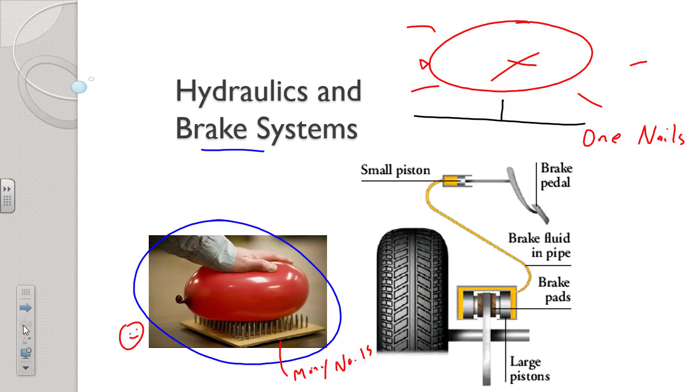What I want you to be able to distinguish in this unit is the difference between a force and a pressure. When this person puts their hand down on the balloon, they're applying a force. But that would be true up here too. If somebody puts a force down on the top of this balloon, the force could be the same. The force isn't what breaks the balloon.

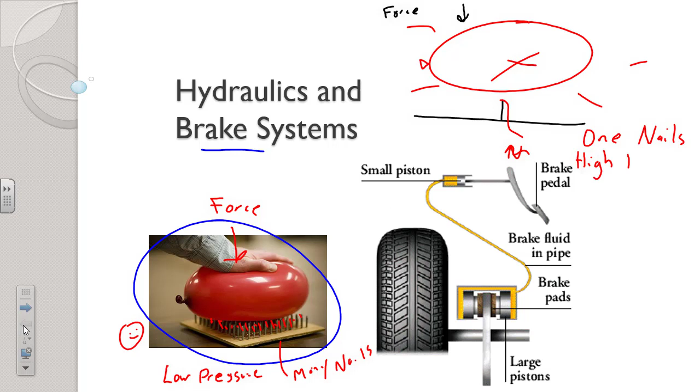As you're probably thinking, that force on the balloon gets spread out when there's a lot of nails. So all those nails are pushing simultaneously on the balloon, and that decreases the pressure. Even though it looks really dramatic, because there's so many nails, there's not that much pressure on the balloon. Whereas here, where there's only one nail, that would create a spot where there's a real high pressure, and that's going to break through the balloon. So let's explore that a little bit more.

Okay, fundamentally, this is the relationship that we're going to build on today. The amount of force that we have applied to an object, and force always gets measured in pounds. Now, in the metric system, we could measure that force in newtons, but we're only going to work in the imperial system. And so LBS, the abbreviation for pounds, will always be our unit of force. So when you stand on a bathroom scale, you're exerting a force on that scale, and that's what the scale reports. Pressure is a measure of how spread out the force is.

You're familiar with pressure because we measure pressure in pounds per square inch, or we often see that as PSI. When you check your tire pressure, you're getting the amount of force spread out over some area. You might hear somebody say that a tire has 35 pounds of pressure. That's really not correct. It's pounds per square inch, or PSI. And area is the measurement of the area that the force is applied over. And area is always going to be measured in square inches, which will typically be represented as inches squared. So let's do a few examples here.

Let's suppose that there's a 120-pound woman who's standing on one heel, and I've got a pretty high heel shown here, but she's standing on one heel, and she puts all 120 pounds right on that one heel. And the question is, how much pressure is created underneath her heel? Well, we're going to use this wheel. This should go on your conversion sheet, like many of the other formulas we've had. And this is just like the percentage wheel or the torque wheel that we've worked with. If the question is how much pressure is created, we're looking for P. And so the wheel says that to find pressure, we should take the force that's applied and divide it by the area that it's spread out over.

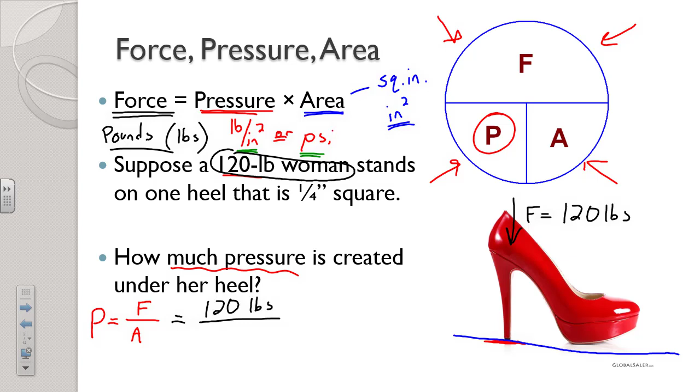Now, we have a 120-pound woman. That is our force. So the force that's being applied downward is 120 pounds. Now for area, we're assuming that only her heel is touching the ground and that the toe is off the ground, and so we need to find out what that area is. A 1/4 inch square, that's not an area. We need to calculate the area. So picture this for a minute. The square underneath that heel, if we could look underneath and see it, would be a square. That heel is roughly square, and each side is 0.25 inches.

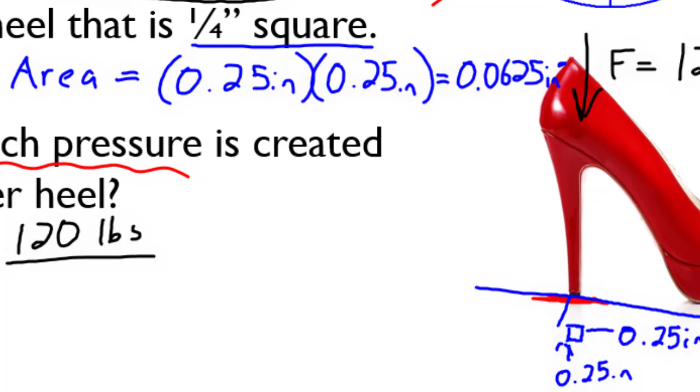And therefore, to find the area, from our geometry section that we just finished, is 0.25 inches times 0.25 inches. If you multiply those together, you get 0.0625, and those are now square inches. That is the area underneath her heel. And so that 120 pounds is being concentrated. It's not being spread out at all. It's being concentrated over 0.0625 square inches. So divide that. Use your calculator. Work this with me here. 120 divided by 0.0625 turns out to be 1,920. But 1,920 what? Those are 1,920 pounds per square inch.

Or you could say 1,920 psi. And that takes care of it. So that's the kind of pressure. That's a very, very high pressure, but it makes sense. Think about all the force that she's concentrating over that small area. That's enough to break the heel or crush a lot of things that it might be on top of.

The key here is we were asked how much pressure. Our wheel tells us that pressure is force divided by area. We were told the force she's applying. We calculated the area, and that allowed us to find our pressure. Let's do some more examples.

Okay, in case you've never seen one of these before, this is a funny little contraption. It's a heavy-duty balloon that attaches to your exhaust. I'm going to play a little video here.

But nothing like an ARB X-Jack. What's that? Did you get the back wheel off too? Keep going a little bit more. Is it hard to hold? Okay, that's good. Check it out, guys.

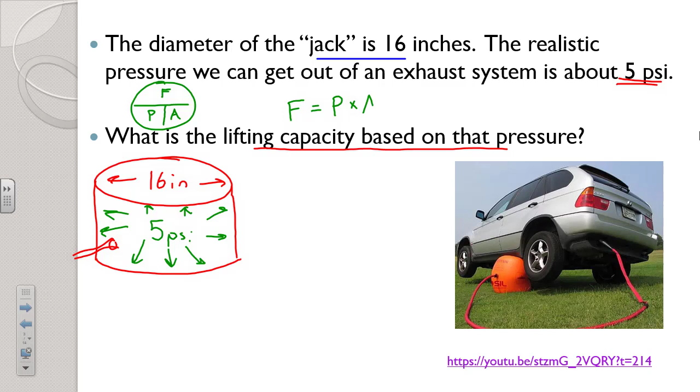But the only direction that matters is the upward direction, because that's where the lifting occurs. So what is the lifting capacity? That is to say, what is our force? From our wheel, we know that force is pressure times area. And so if we want to find our force, we're going to take our pressure times the area. So we already know the pressure. The pressure is 5 psi.

Now our area, well, we've got to find out what the area of the top of this bag is. The area is a circle. I'm drawing it in perspective so it looks a little flat, whose radius then must be 8 inches. And so our area is going to be pi times 8 inches squared. Note that we don't need the volume. We don't care what the volume of this bag is. It doesn't even matter how tall it is. All that matters is the top of the bag. And if we multiply it out, we get an area of about 201.1 square inches.

So each one of those square inches on the top of the bag, if you want to picture it, each one of those square inches, 1 inch by 1 inch, has got 5 psi pushing at it. And there's a lot of them. There's a lot of 1 inch squares up there. So 5 psi times 201.1 square inches, that is our force, that is our pressure times our area. And that gives us about 1,005.5, or about 1,006 pounds. So about a half a ton of lifting based on that pressure.

If we want more lifting force, well, we either need a bigger bag so we have a larger area, or we need more pressure. We need to rev the engine or seal up the exhaust a little better. Okay, so let's look at that problem from a different angle here. Let's suppose again that the diameter of that jack is 16 inches and that the weight of the car is 3,100 pounds. If we want to lift just the front quarter of the car off the ground, then how much pressure do we need?

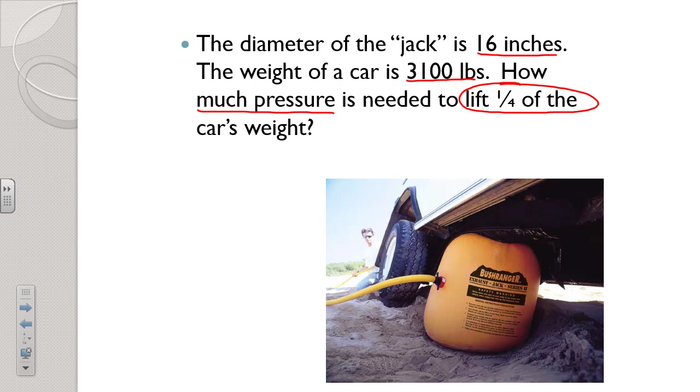Well, once again, our wheel says if we're looking for pressure, we're going to take our force that we need to create and divide it by the area. So to find our pressure, how much force do we need? We don't have to lift all 3,100 pounds. We only need to lift a quarter of the car, that is to say one wheel. So 3,100 times 1/4 or times 0.25, that turns out to be 775 pounds to lift just 1/4 of the car. So we need to come up with 775 pounds.

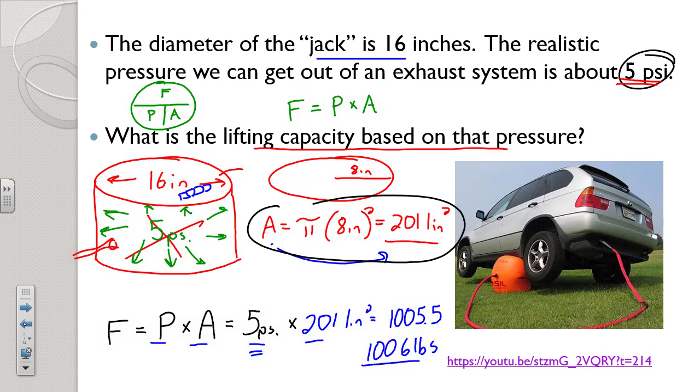The bag is the same. The diameter is still 16 inches. We don't need to redo that math. We already showed that the area is 201.1. My board is not picking up my decimal places very well. 201.1 square inches. And we end up with about 3.9 psi. That's how much pressure we'll need to come up with in order to lift it. If we can't make that much pressure, we're not going to get the wheel off the ground.

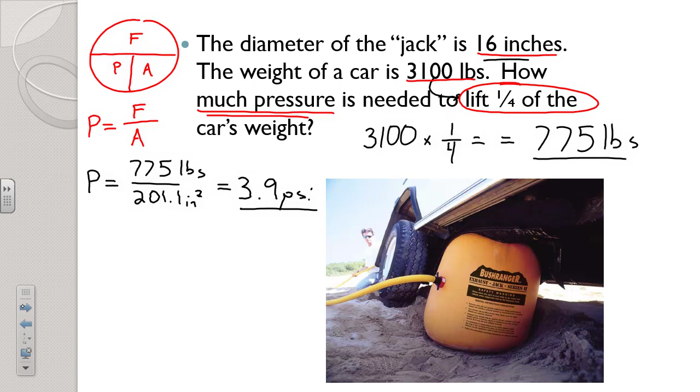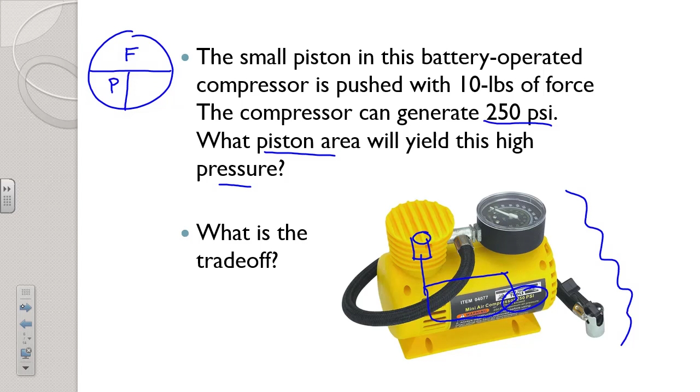Well, the trick is it's all about the piston area. The tiny little piston that's inside of here is not very big, but there's a real little piston in here that's being driven by the electric motor that's down in here. What piston area will yield this high pressure? Well, again, let's go to our wheel. This time, though, we're looking for what piston area. We're trying to find our area.

The wheel says that if we want to find area, we should put force over our pressure. Now this one's pretty straightforward because we know how much force we apply. The piston gets pushed with 10 pounds of force, and so that's going to be 10 pounds, and we're going to divide that by a pressure of 250 psi. And if you divide that, you get 0.04. Now what are your units on that? Well, our area is always in square inches for our calculation, 0.04 square inches.

And that's very, very small. A square inch is just a little inch by an inch. 0.04 square inches, that's smaller than the woman's high heel that we saw earlier. That's about the size of the tip of the eraser on your pencil. It is really small. And that's how that tiny little 12-volt motor in here is able to create such high pressure.

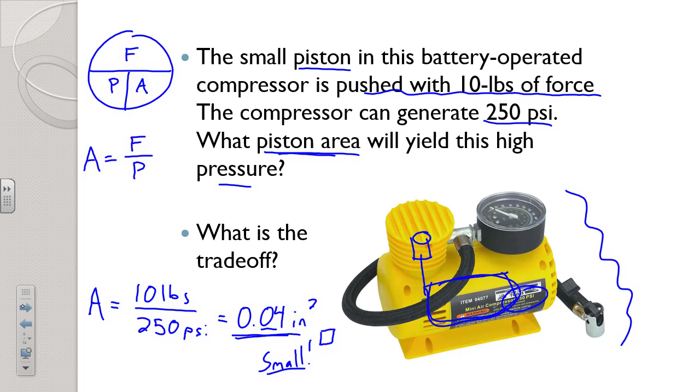So I want to bring this short topic to a close here, but let's talk about how this works within your brake system. Within your brake system, think about what happens. When you push on the brake pedal, that lever squeezes in on the brake fluid inside your master cylinder. There's a real small piston inside your master cylinder that acts like the high heel from our first example, and it squeezes in on this brake fluid, and what it does is it creates high pressure. It creates high pressure due to that high heel effect because we take all the force of your leg and concentrate it over such a small piston.

Now that high pressure then gets sent out to each of the actuating mechanisms in your wheels, whether it be a brake shoe or a brake caliper, and then each caliper allows that brake fluid, kind of like the exhaust jack, to push out on the piston which clamps against your brake pad. And so your exhaust jack then takes that high pressure and turns it into a very large force, and that's how your vehicle is able to stop. So let's work through that part by part.

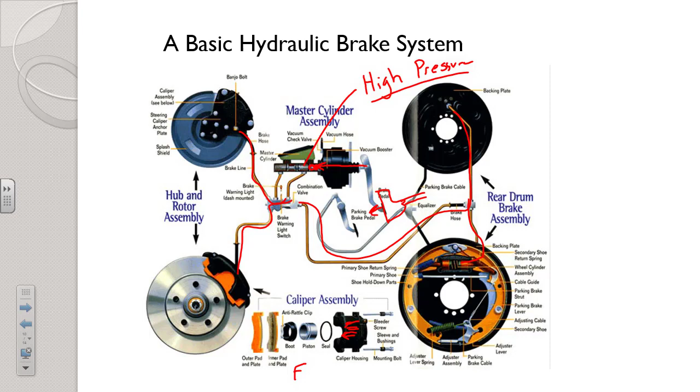The first thing we got to recognize is a formula that deals with your brake pedal. Okay, your brake pedal actually does a lot of the work in your braking system. So here's a formula you need to have. Your brake pedal mechanical advantage. The mechanical advantage of your brake pedal is a lot like your rocker arm ratio, which we already worked with. So the difference is the fulcrum is up here on a brake pedal. The pivot point is at the top. So that's your fulcrum. This point right here is our output point to master cylinder.

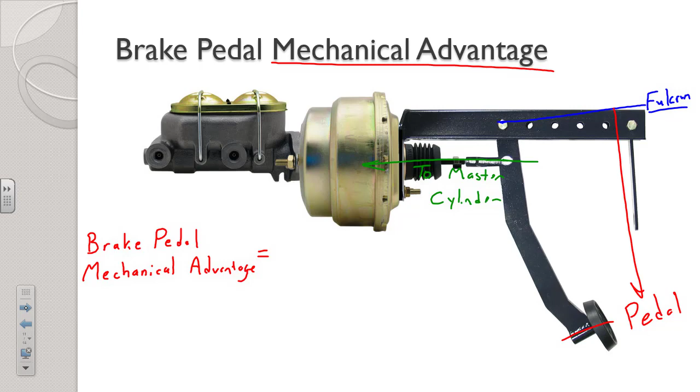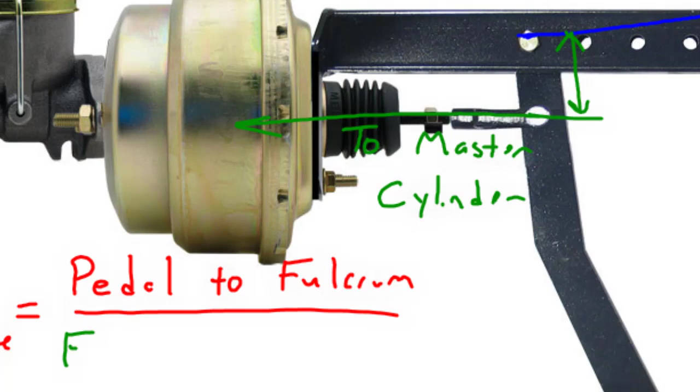And of course down here at the bottom, so to get the mechanical advantage, we have to divide the distance from the pedal all the way to the fulcrum, and we divide that by this distance right here, which is the fulcrum to the master cylinder. The math is slightly different, but the idea is exactly the same as a rocker arm ratio like we saw a couple of lessons ago. So let's crunch some numbers here. Suppose I give you these dimensions.

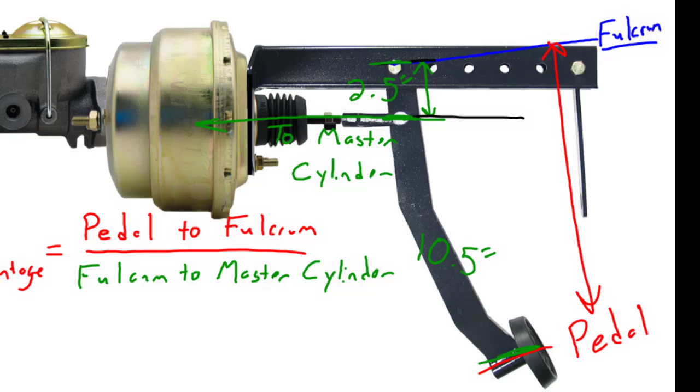Let's suppose the distance from our master cylinder up to our fulcrum is 2.5 inches. And suppose the distance from the pedal up to the master cylinder is 10.5 inches. Now be careful here. I'm giving you the distance up to the master cylinder pivot point. That's 10.5 inches. When we go to get our mechanical advantage for this brake pedal, the pedal to the fulcrum, every picture is going to be different that you're going to see, but the pedal all the way up to the fulcrum would be 10.5 plus 2.5. That would be 13 inches if we add these two dimensions together. So our pedal all the way up to the fulcrum is 13 inches.

And we're going to divide that by the fulcrum to the master cylinder. That's going to be 2.5 inches. The units cancel as it always does, just like in rocker ratios. And we end up with 5.2. And so since that's a ratio, we would say the mechanical advantage of our brake pedal is 5.2 to 1. Now we can go a little bit further than that.

I'm going to note that our brake pedal here is a 5.2 to 1 brake pedal and build one more idea. Here's why that number is important. Suppose you're driving your car and a deer jumps out in front of you, and you, with your fancy shoes here, go and push on that brake pedal with 40 pounds of force.

The brake pedal acts like a lever, just like your rocker ratio, and the brake pedal mechanical advantage tells you how much this gets multiplied. So the amount of force that actually goes in on your piston inside the master cylinder, that is to say the force on your brake fluid, is much higher than 40 pounds thanks to your brake pedal. That's going to be 40 pounds times your brake pedal ratio of 5.2. And if you multiply that out, you get 208 pounds of force.

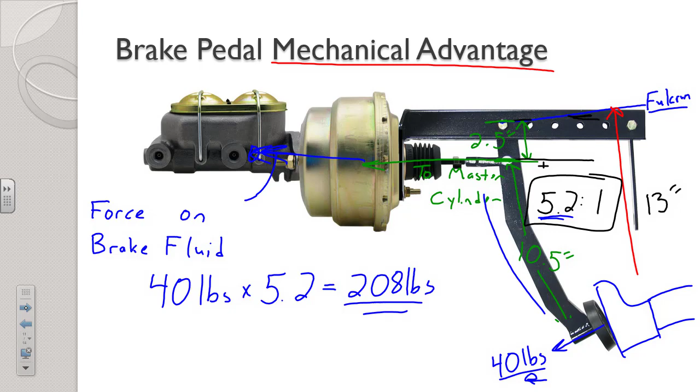Now, that's not pressure. We would need to know how big this piston is to figure out our pressure, and we'll do that in the next example. But the key is, even though you're only putting in 40 pounds, because of the leverage that you get out of your brake pedal, it becomes 208 pounds up here inside your master cylinder. So let's go a little bit further with that.

The master cylinder shown here has a piston diameter of 0.750 inches. We're going to put 80 pounds of force on the brake pedal here, and we want to know how much pressure there is in the braking system. Okay, we're going to start out the same way. Figure out the mechanical advantage of our brake pedal.

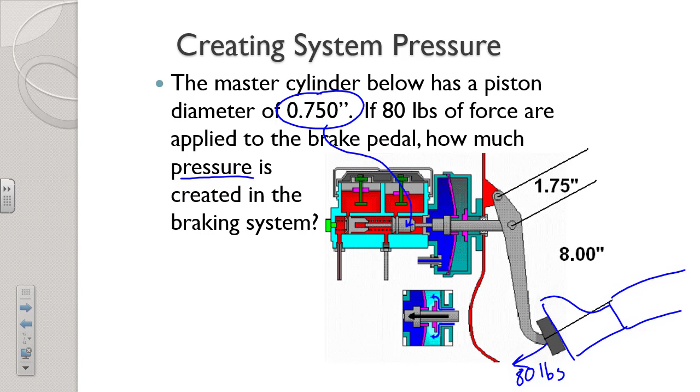The mechanical advantage, or MA we'll call it, is the distance from the pedal all the way up to the fulcrum, which in this case we'd have to add those two together. That's going to be 9.75, because the 8 inches is only up to here in this picture. And we're going to divide that by the distance from the master cylinder to the fulcrum. That's 1.75. Units cancel, and we get about 5.6 to 1. There's no rounding rule here, but 1 decimal is typically good enough, so we get a 5.6 to 1 mechanical advantage.

Now here's the thing. How much force is there actually pushing in on our brake fluid here? Well, the amount of force isn't 80 pounds. The amount of force that we have right here is going to be the 80 pounds that you apply times the mechanical advantage of our brake pedal, or about 5.6. And so that turns out to be about 448 pounds of force on our brake fluid. That's a lot more than you're providing with your leg. And although we're not going to do the math on that here, most modern vehicles have got a brake booster that helps that out even more. But we're going to ignore that in the work that we're doing right now.

Now we can answer the question. The question is, how much pressure is there in the braking system? Well, here again, if we want to find pressure, we're going to take the force that's applied and divide it by the area that it's concentrated on. So we now know that our force is not 80, it's 448 pounds divided by the area. Well, shucks, what is our area? We're told that the diameter is 0.75.

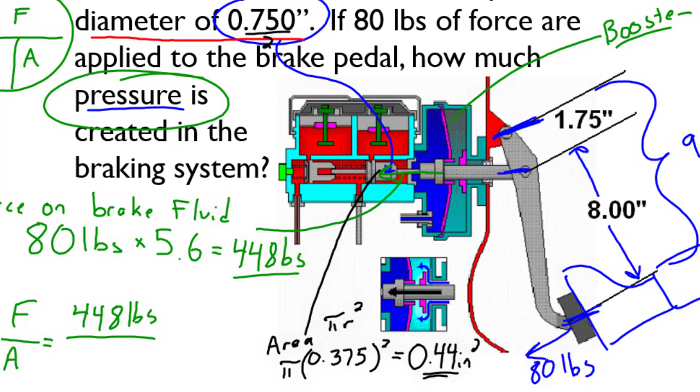That's not the area. The area of that piston, that's a little circle. We know it is because we're given a diameter. So area is equal to pi times the radius squared. Now if our diameter is 0.75, we have to divide that by 2, and our radius is 0.375 inches squared. And that means the area of that master cylinder is 0.44 square inches. That is our area that our 448 pounds is concentrated on.

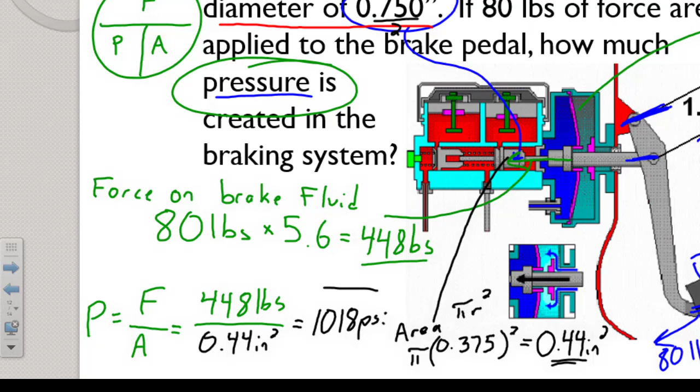And if you divide that, you get about 1,018 psi. So just you pushing on the brake pedal, along with the help from the small piston in your master cylinder and the brake pedal itself, are creating over 1,000 psi in the brake system. 1,018 psi. That's a lot of pressure. And that is going to get sent out to each wheel to do the braking. So let's see what happens at one of the wheels.

That 1,018 psi that we just calculated is going to go into a brake caliper, and it's going to push out on the piston of the brake caliper, and that's going to do our braking. Now, we have a 1.750 inch piston. Whenever we talk about a piston, we're always giving the diameter. So 1.750 inches is the diameter of that piston.

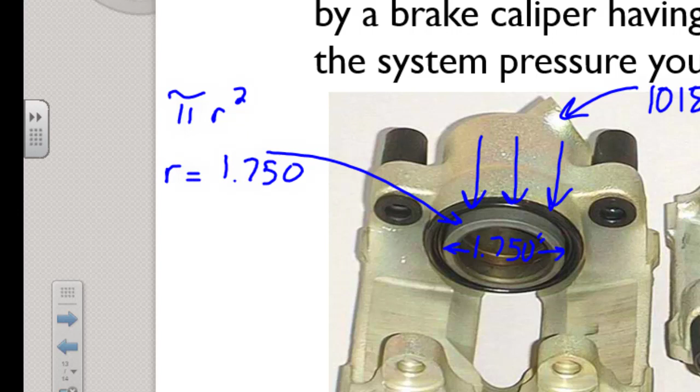We need to calculate the area. So since it's obviously a circle, our area will be pi r squared. Our radius must be 1.750 divided by 2, and so our radius is 0.875. And so our area is going to be pi times 0.875 squared, and that means our area turns out to be 2.41 square inches. That is the area of this piston, and that's the area that that brake fluid can push against.

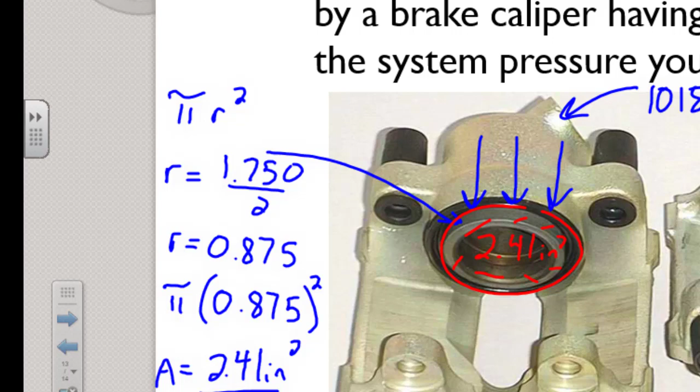So the question of how much clamping force? Well, here again, force is pressure times area, and we now know both. And so our force will be found by taking our pressure of 1,018 psi, as we saw in the last slide, times an area of 2.41 square inches. Means that the clamping force on that piston is about 2,453 pounds. So there's over a ton, almost 2,500 pounds of clamping force on the brake pad, and that's what'll

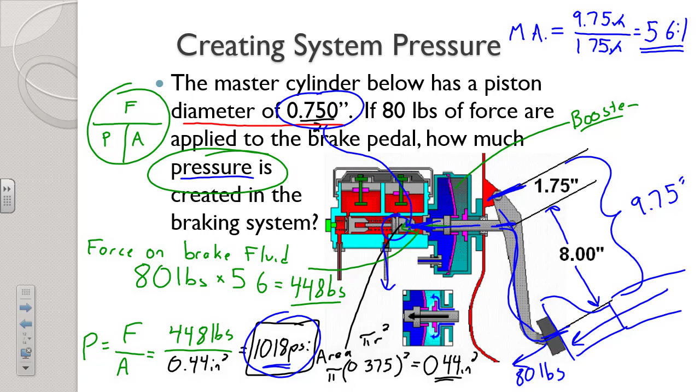slow your car down. So I want to review what happens here. You start out with a mechanical force, a physical force that pushes on the brake pedal. Your brake pedal increases that. Your master cylinder takes that force, that hard mechanical force, contains it, applies it to a fluid, and it turns it into a pressure. That pressure is in the form of brake fluid, and that goes out through your brake lines. Then once it gets to each wheel, the calipers, or wheel cylinders as the case may be, take that pressure, make it push against a piston, and turn it back into a hard mechanical force.

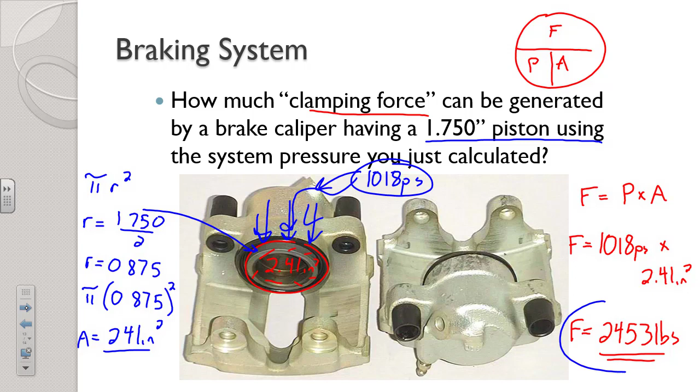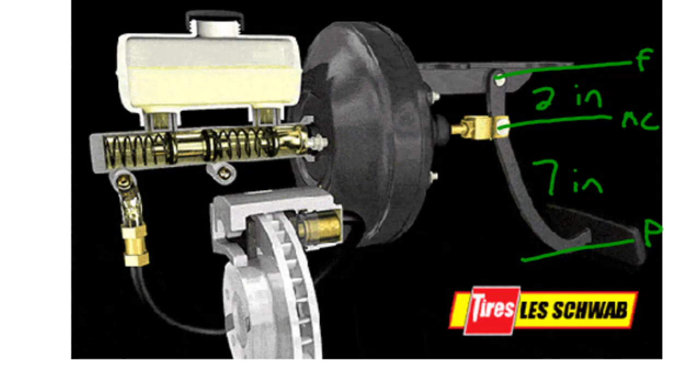Okay, I've got one practice problem I'd like you to work here before we close this lesson. So I'm giving you a simple brake system with some dimensions here. The distance from the fulcrum down to the master cylinder is 2 inches, and from the master cylinder down to the pedal is another 7 inches. I want you to use those dimensions to figure out your mechanical advantage. I'm giving you a master cylinder with a piston having a diameter of 0.65 inches right there, pushing on our brake fluid. And then that brake fluid goes out to push on a caliper whose piston diameter is 2 inches right here. And we're taking 90 pounds and putting it on the brake pedal when we hit the brakes in a hurry. Go ahead and work that problem from start to finish and unpause to see the solution.

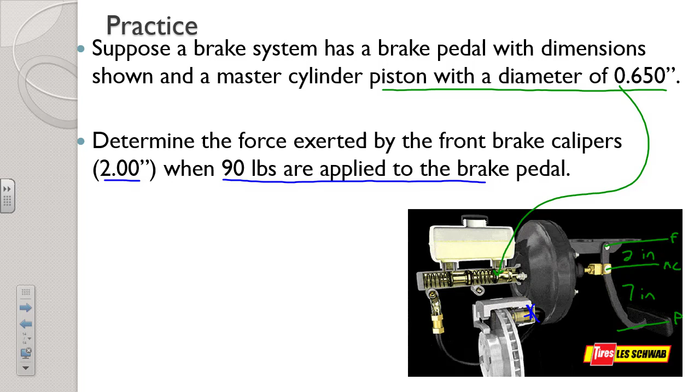Okay, here we go. I'm going to start at the top. The mechanical advantage of our brake pedal is a grand total of, from the pedal up to the fulcrum, that's 9 inches. So we're going to divide 9 inches from the pedal to our fulcrum, divided by, from the fulcrum to the master cylinder, that's only 2 inches. So 9 inches divided by 2 inches, units cancel, that's going to be a 4.5 to 1 mechanical advantage. That's our first step. Now our second step is to multiply that by the force that we apply. We're putting 90 pounds of force on the brake pedal, and so our force on the brake fluid is 90 pounds times 4.5. That turns out to be 405 pounds of force right here pushing in on the brake fluid.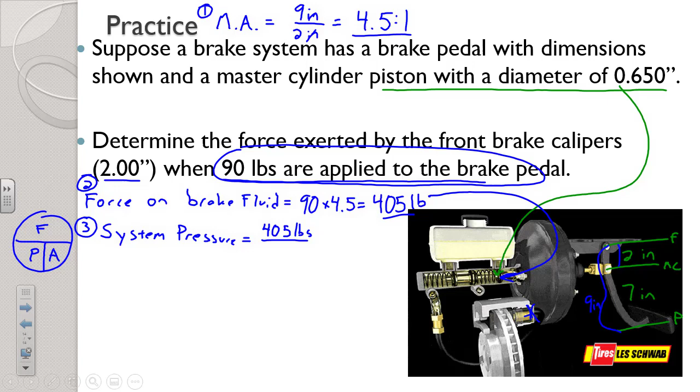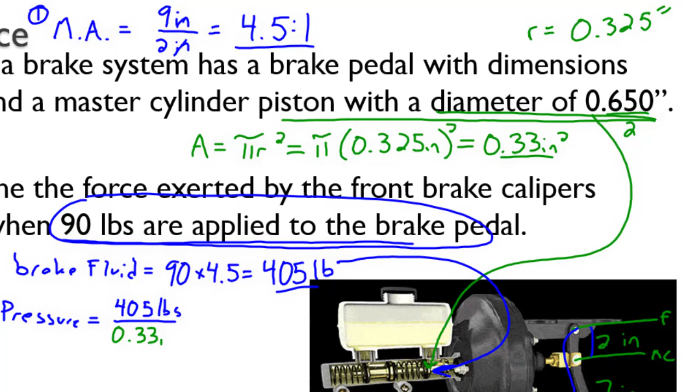That's step 2. Now, the master cylinder turns that force into a pressure. So the system pressure is going to be force divided by area. That's 405 pounds, divided by our area. The piston diameter is 0.65. And since the diameter is 0.65, we can divide that by 2 and note that our radius is 0.325. And so our master cylinder piston area is 0.33 square inches. So our 405 pounds is going to get concentrated over 0.33 square inches. That means our brake system pressure is about 1,227 psi. So that 1,227 psi is in here in our brake fluid, and that fluid gets squeezed down through our brake lines, which hopefully don't burst, and in behind that piston. It's going to push that piston out.

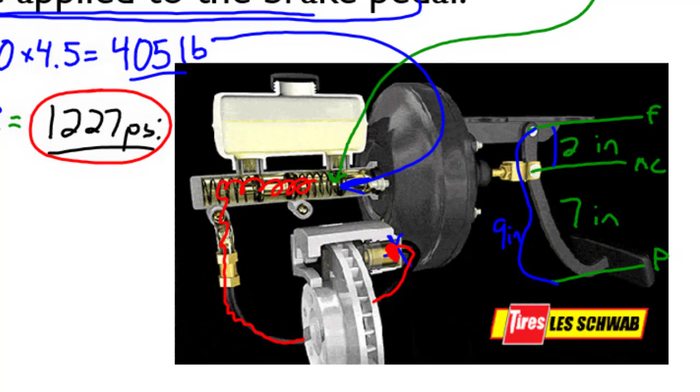So now the last thing we need to do is figure out how much force our piston applies on the wheel caliper. So our caliper piston area is going to be pi times, it has a diameter of 2 inches, our radius is obviously 1, and pi times 1 squared is 3.14 square inches. And so our final step, since we know the system pressure, our final step is to calculate the clamping force. Force is going to be pressure times area. That's 1,227 psi times 3.14 square inches. And we get 3,853 pounds of clamping force. So we're talking about nearly 2 tons of clamping force being squeezed on our brake pads here to bring the vehicle to a stop.

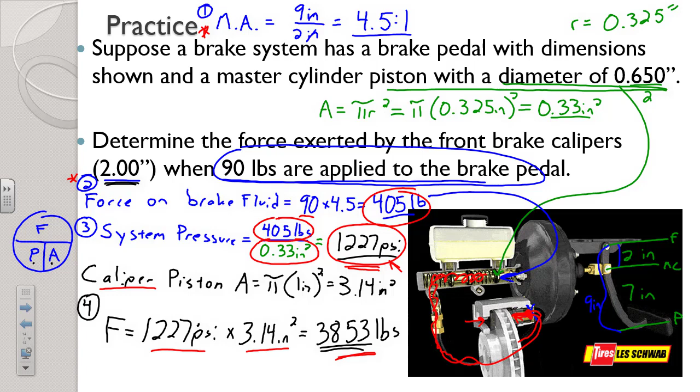So here again, we started with the mechanical advantage, and then we multiplied that by the force that we apply, and that gave us the amount of force on the brake fluid. Then we take that force, divide it by the area of the master cylinder piston, and that gives us our system pressure. That's what causes rusty brake lines to pop right here. Once we know that system pressure, it travels out to each of the wheels, and the caliper is designed to turn that pressure times its piston area back into a force, and that does the job. All those things are based on our initial relationship that ties force, pressure, and area together.